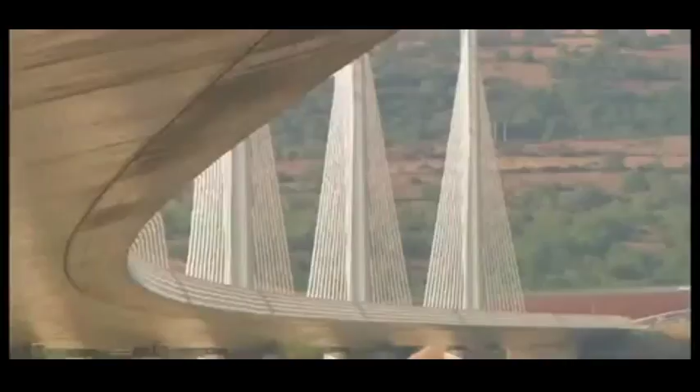This is the Millau Viaduct, the tallest bridge in the world. Its highest tower stretches a staggering 343 meters, so high the bridge glides above the clouds. But this is a megastructure they said couldn't be built. When I first showed the drawing of this bridge, they really thought I was crazy.

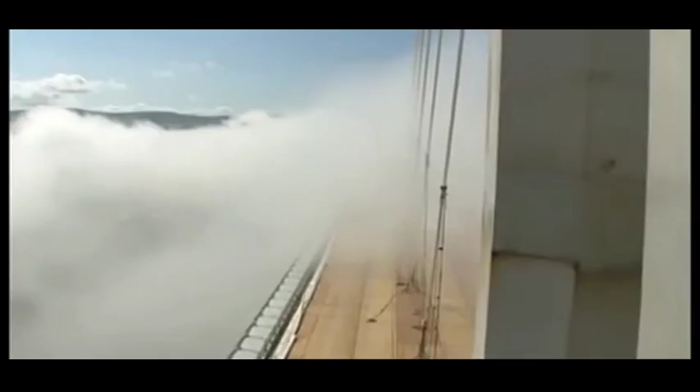The team attempting to build this amazing freeway in the sky had to survive landslides, fight winds gusting at 130 kilometers an hour, and weather massive storms as the bridge simply hung in the balance. It's a bridge that pushes the boundaries of engineering to the limits, and then beyond.

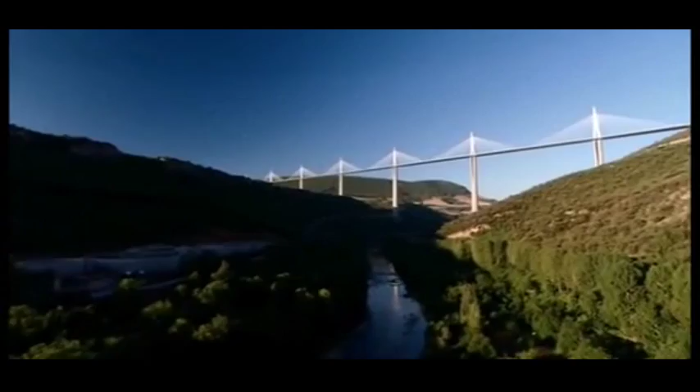Imagine building a series of Eiffel Towers, then slinging a 4-lane highway between them, all the way across one of the deepest valleys in France. Impossible though it sounds, that pretty much describes the building of the Millau Viaduct.

From the start, the construction team faced 3 daunting challenges: build the tallest bridge piers in the world; put a 36,000-ton freeway on top of them; and erect 7 steel pylons, each weighing 700 tons. And what's more, they had to do this hundreds of meters above solid ground, so high that if you were on top of the Eiffel Tower, you'd still be looking up at this awesome bridge.

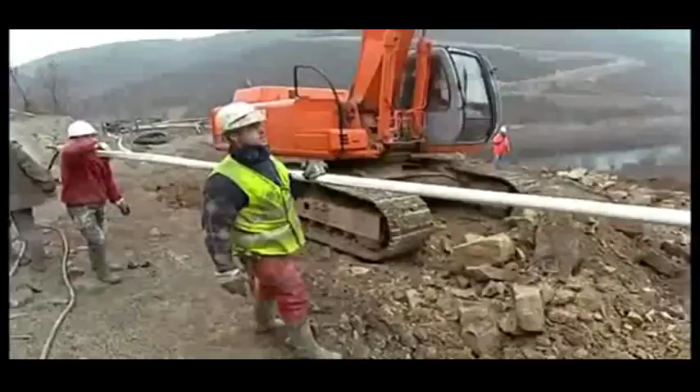October 2001, the team break ground. They're required to build a bridge that'll last for 120 years. And to win the contract, the teams promised to build it in record time, less than 4 years. By comparison, the world's longest suspension bridge, the Akashi Kaikyo in Japan, took a full 10 years to build.

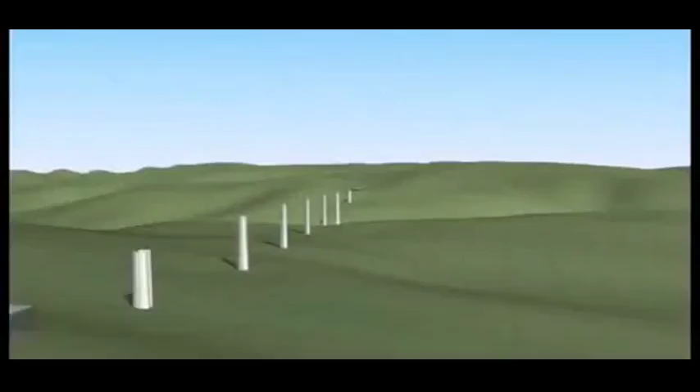To up the ante, any delay will cost them $30,000 a day in penalties. There are 7 piers numbered from the northern end of the valley. Number 1 will pose problems because of the steep slope. Number 2 will be the biggest challenge since it's the tallest. Crossing the river, number 3 is not much shorter. Then 4, 5, 6, and 7 climb the gentler slope to the south.

To begin, the team had to bury the foundations deep in the bedrock in order to support the enormous weight the bridge will place on them. But the forces of nature were stacked against them.

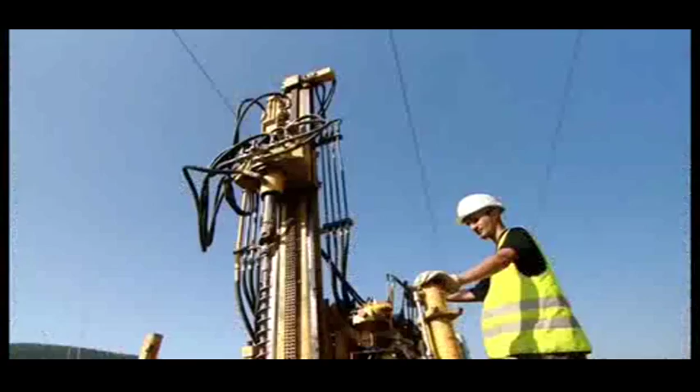Geologists have warned of the risks posed by the region's fractured limestone. The rock is full of cavities that are essential to the local cheese economy. These cave systems, close to Millau, are home to a unique bacteria responsible for the blue mold in the world-famous Roquefort cheese. But what's perfect for cheese could be disastrous for a megastructure.

The geologist's diagnosis spelt one thing: landslides. This kind of catastrophe could jeopardize the entire project. Despite the warnings, building went ahead as planned.

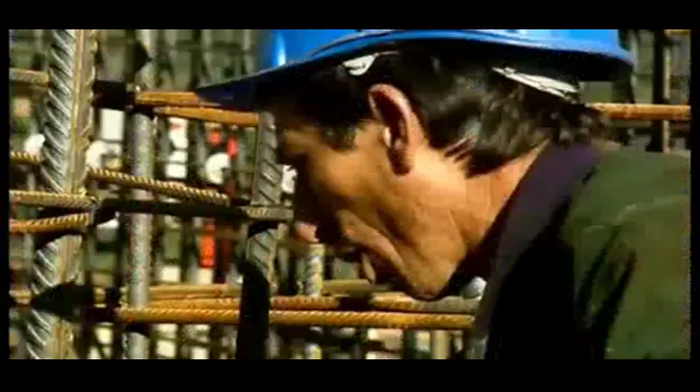Then, well into construction, as predicted, a dramatic storm causes a landslide. 4,000 cubic meters of rock collapse around Pier 1. Fortunately, the fallen rock doesn't damage the pier, but the warning is clear. They're forced to divert precious manpower and equipment to stabilize the slope and prevent a repeat collapse.

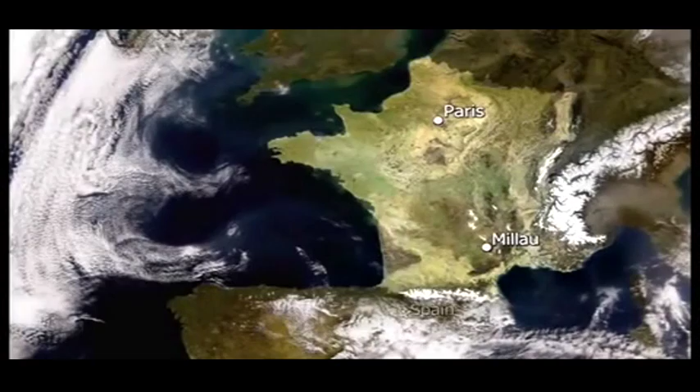So if the area is prone to landslides, why did they build the world's tallest bridge here in the first place? The answer is simple. In the 1980s, France built a freeway linking Paris directly with Spain. This major artery headed south across the French countryside, while from the Mediterranean, the freeway headed north, until they both hit one of the deepest valleys in France and stopped dead.

Welcome to Millau, France's least favorite bottleneck. The town of Millau is in the mountainous region of the Massif Central, one of the most tranquil parts of France. But in summer, this poor medieval town suffered traffic hell.

The locals couldn't take it anymore. Neither could their mayor. It was terrible for our reputation. When you hear every day on the television and radio, avoid Millau, there's a traffic backup, a 5-hour wait in Millau.

And it's not just the people of Millau. Two drivers, Jamila and Jemima, crossing the 30-odd kilometers between the freeway on either side of Millau, reveal exactly why this bridge is needed. Jamila, in car 33, will cross the new bridge, while in car 22, Jemima will take the old road across the valley floor.

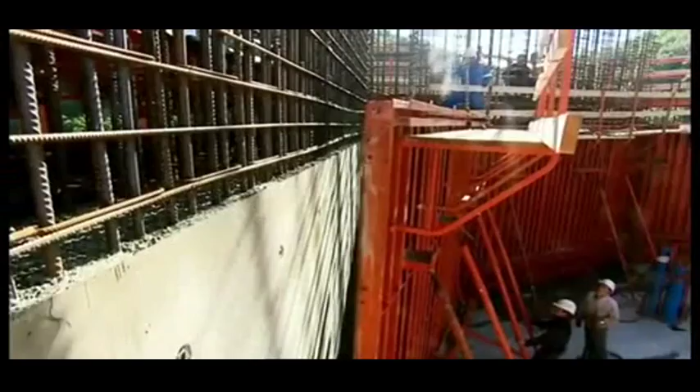The Millau Bridge would not only be the world's tallest, it would be unlike any bridge ever constructed.

When I first showed the drawing of this bridge to the relevant authorities, they really thought I was crazy.

Virlogeux's Normandy Bridge has two sets of cables supporting the deck. But he wanted to up the stakes for Millau by losing one row of cables, so the remaining line would be forced to do twice the work. More dramatically, the 2.5-kilometer Millau Bridge, instead of having a single main span, needed a whole series of piers to support it across the valley.

No bridge builders had ever attempted a multiple-span, single-line cable-stay bridge on this scale before.

The French authorities had a problem. Nervous about Virlogeux's groundbreaking scheme, they held a competition inviting other engineers and architects to compete with different designs.

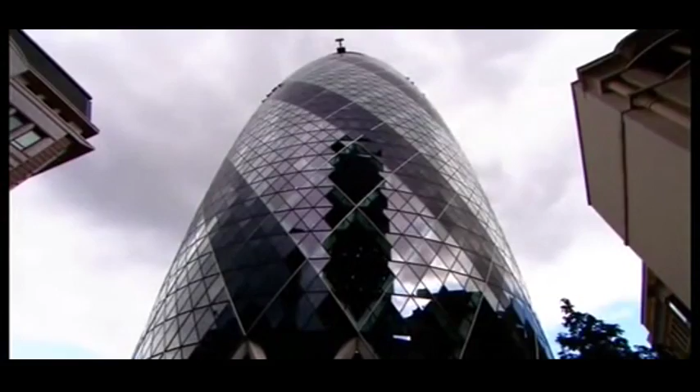The winner, Lord Norman Foster, is one of the world's superstar architects. In Hong Kong, he built the world's largest airport terminal. In Barcelona, offices literally hang from a mast on his communications tower. This is a man who regularly contemplates the impossible and delivers.

You know, it's the challenges, and it's one challenge on top of another, on top of another. And with Millau, one of the biggest challenges was making it fit into the landscape, given it's just down the road from the famous Gorges du Tarn, France's equivalent of the Grand Canyon.

How do you make something which has to be so immensely strong against the forces of nature look very gentle, very delicate? How do you weave something on that scale into the most unbelievable landscape?

Ironically, Foster's answer was to take Virlogeux's pioneering scheme, then push it one stage further. He turned an elegant piece of engineering into a delicate work of art by boldly cutting out two of the nine original piers and seriously slimming down the remaining piers and road deck.

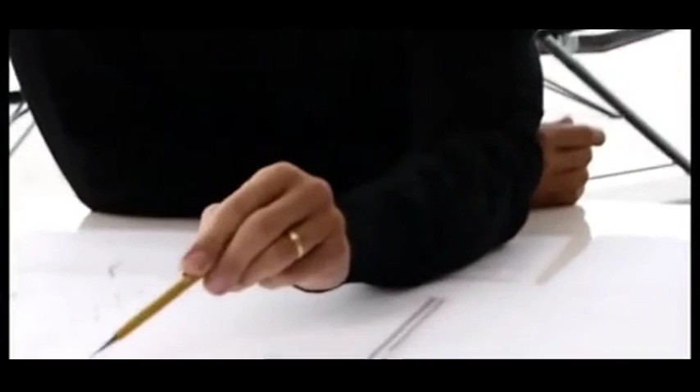Foster wanted the bridge to appear as delicate as a butterfly, but this butterfly has to support the weight of five Eiffel Towers in gale-force winds hundreds of meters above the River Tarn. Getting the design wrong would be a disaster.

Then, with Millau still on the drawing board, Foster's record as a bridge builder suffered a major setback. His Millennium Bridge in London is actually another record-breaking structure, the lowest profile suspension bridge in the world. But when this footbridge opened to the public in June 2000, it was a public relations disaster.

Crowds walking over it set up a resonant frequency, and the bridge began to sway. As people adjusted their step to the small initial wobble, the effect was magnified. Though it didn't threaten the structure, the swinging motion became so dramatic the authorities closed the bridge for a refit that took 1.5 years and ended up costing over $8 million.

It was a bad omen for the Millau Bridge, where construction was soon to begin. And at 15 times the height, a design flaw would be a catastrophe.

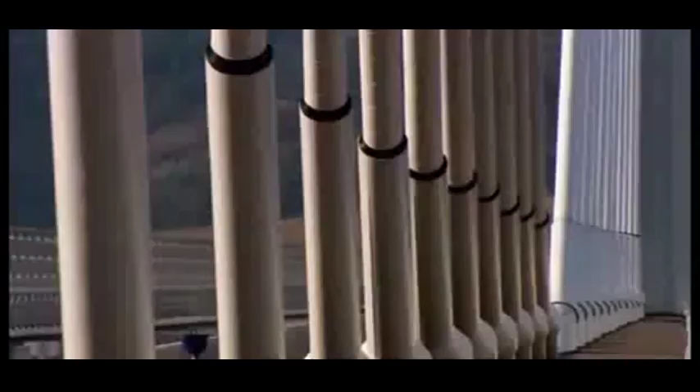December 2001, France's Millau Viaduct, the tallest bridge in the world, is under construction. Everything about this project is supersized. It'll need 200,000 tons of concrete, so much that the team have to build a concrete factory on site.

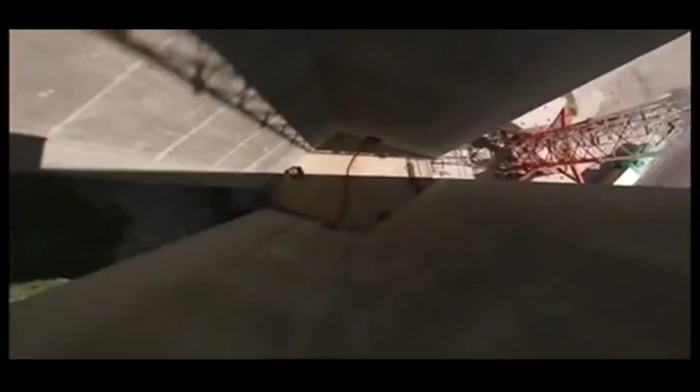But there's nothing straightforward about this concrete. The formula must be just right. It needs structural strength to support the massive loads it'll have to bear. But it can't set too quickly, as it has to be hoisted into position and poured hundreds of meters in the air. And it needs to be just the right color to suit Norman Foster's vision.

In fact, the architect's vision has created a headache for the construction team. He's designed each pier as a complicated geometric shape, tapering the entire way up with vertical grooves set into them to create shadows. But what's just a line on paper for the architect was a major challenge to build.

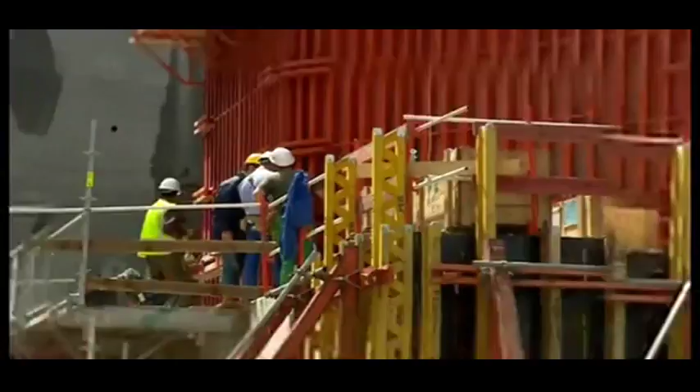The enormous piers are built step by step by pouring concrete into a temporary mold. To give the required strength, the molds are filled with a frame of steel reinforcing bars.

In total, 16,000 tons of these steel bars are hoisted into place and secured. Laid end to end, they'd stretch the 4,000 kilometers from Millau all the way to Central Africa.

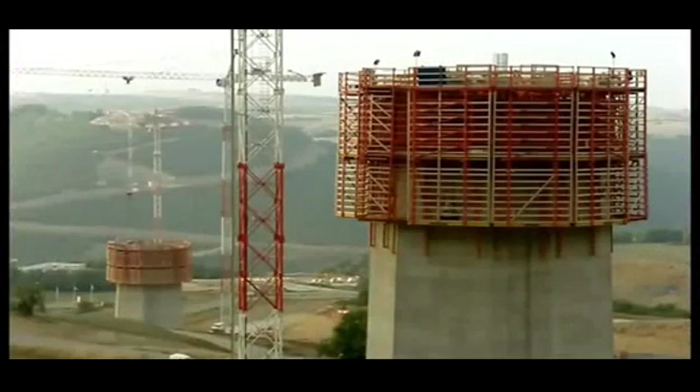The shape of each pier is seriously complicated. As a result, each time they remove the sections of red steel shuttering, they have to change the shape of the mold to fit the profile of the next 4-meter section.

Manhandling these steel panels, weighing up to 15 tons apiece, is no picnic. And with the combined height of the seven piers totaling well over a kilometer, they have to change the shape of the mold over 250 times.

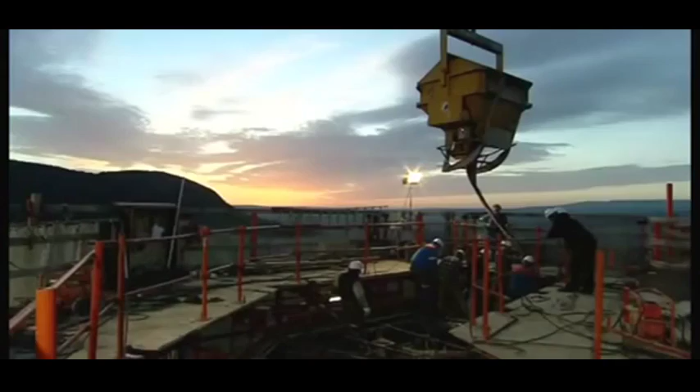Every 3 days, each team on each pier went through this whole cycle, then repeated the process. But it was a race against time, with a permanent threat of delay.

Keeping the entire build on time and to budget was the daunting responsibility of one man, Jean-Pierre Martin. If instead of 3 days we took 4, imagine that multiplied by the number of castings. We'd end up with a 3 or 6 month delay.

With a penalty of nearly $1 million a month, this isn't something Martin wanted to contemplate. And this schedule wasn't his only headache.

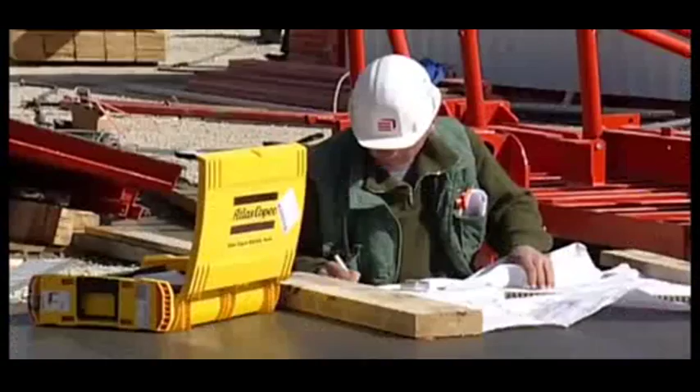You have to be pinpoint accurate when you're building the tallest bridge piers in the world. Get it wrong, and the bridge simply won't fit together.

Just 10 centimeters out, about a hand's width on each 4-meter section, and the tallest pier could be 6 meters off at the top, the width of a jumbo jet fuselage.

Each team was aiming for a specific point in the sky. For Pier 2, this was exactly 245 meters above the ground, 546 meters from the north side, and 1,914 meters from the southern end. There was no room for error.

The only chance they had to get it right was with GPS, accurate to within 4 millimeters. Using signals from multiple satellites, the team could pinpoint their position and make sure they're on target for that critical point in the sky they needed to hit.

Month after month, the piers climbed higher. Finally, by November 2003, they reached their full height. At 245 meters, Pier 2 becomes the highest bridge pier in the world.

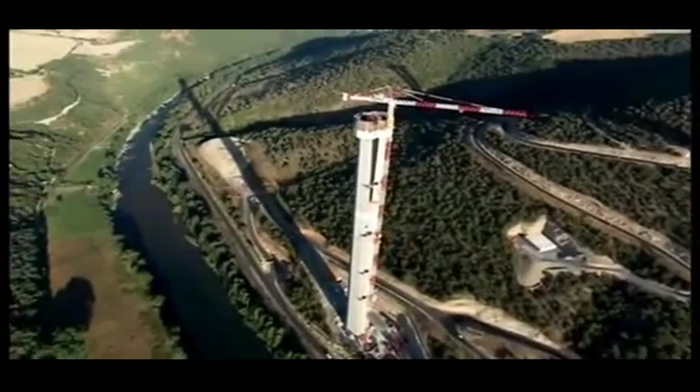But is this record-breaking pillar where it's supposed to be? Amazingly, it's dead on target, to within 2 centimeters.

Champagne corks pop. It's time for a major celebration.

Against all the odds, they were 1 month ahead of schedule, but the team couldn't afford to relax. The next stage of the project would be the most difficult part of the build.

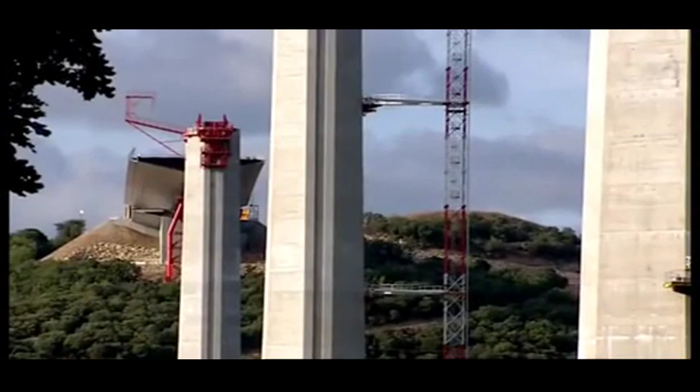Phase 2 of building the world's tallest bridge involved putting a 2.5-kilometer roadway weighing 36,000 tons on top of the piers, a full 270 meters above the River Tarn.

Bridge builders know danger comes with the territory, but working at these heights can be lethal.

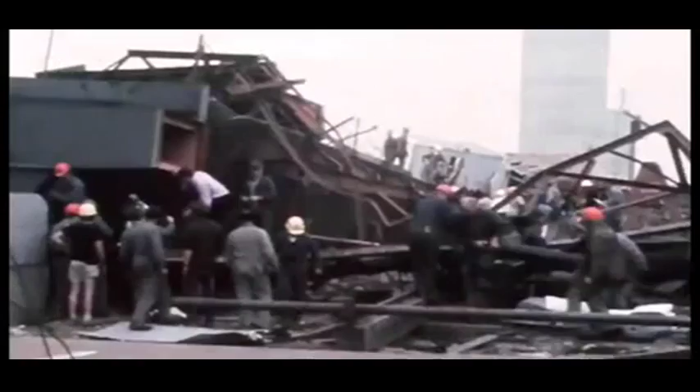More than 34 died constructing New York's Brooklyn Bridge. 35 died in 1970 on the Westgate Bridge in Melbourne, Australia. And 1 year later, 13 workers were killed when the Koblenz Bridge in Germany collapsed into the Rhine.

With these fatalities in mind, the team decided to fabricate the entire road deck on the safety of solid ground. This meant building it in steel, which in theory would be much safer than lifting vast concrete sections hundreds of meters into position.

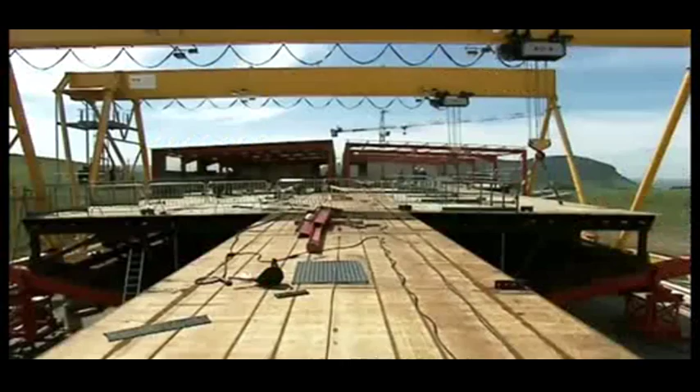There's only one problem with this plan. No one had ever put a road deck on piers anything like this height before, let alone over a 2.5-kilometer span.

In the end, only one steel manufacturer had the courage to take on this colossal challenge. Eiffel, the steel firm set up by the great French engineer.

Eiffel built what was once the tallest bridge in the world, the Garabit Viaduct in southern France, before getting round to the framing for New York's Statue of Liberty and, of course, his signature tower in Paris.

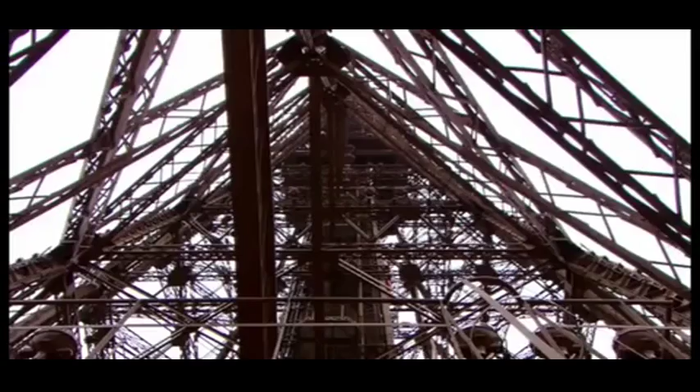But despite the company's experience, Eiffel's director, Marc Buonomo, knew he was taking a serious risk. It was a gamble for the company, because if there had been a mistake, if it hadn't worked, it would have been the whole company.

They fabricated the massive sections that would make up the road deck in the company's steel factories. This immense jigsaw puzzle involved manufacturing 2,200 separate sections, weighing up to 90 tons, and some of them 22 meters long.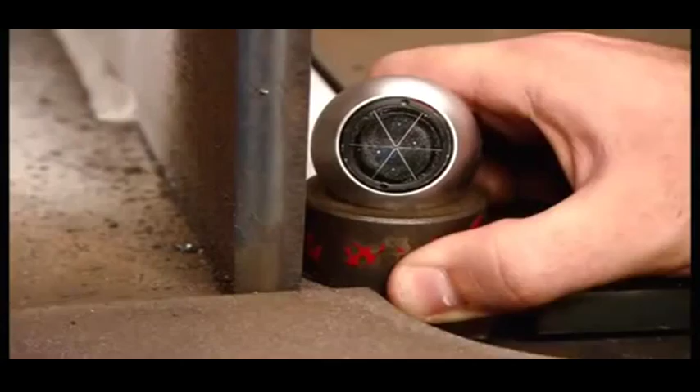Their accuracy is measured with a laser to within a fraction of a millimeter.

The huge square tubes are the central spine that should make the deck rigid. The triangular side panels will be welded on either side to create the width for a 4-lane highway.

To meet the punishing schedule, Buonomo automated the manufacturing with a 2-headed welding robot and a plasma cutting machine.

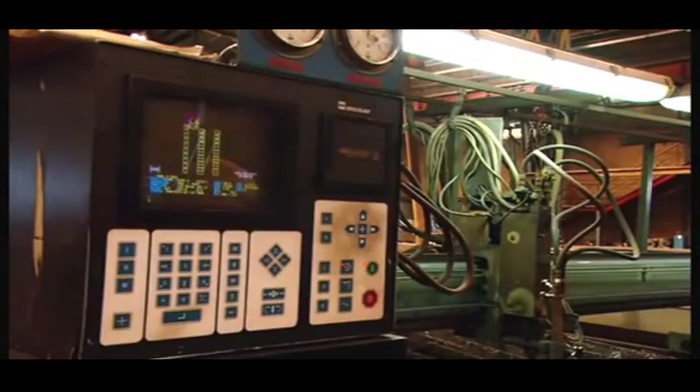Each cutting pattern or template is programmed into the computer. Then the machine automatically blazes its way through the steel. The torch reaches a scorching 28,000 degrees centigrade. That's 5 times the temperature of the Earth's inner core.

But cutting and welding was the easy part. The hard part was getting these monster sections the hundreds of kilometers from the factories to Millau.

The routes had to be planned with precision to avoid major damage. The police coordinated safety and clearances.

Even with that level of preparation, some obstacles felt as if they're cutting it just too close for comfort.

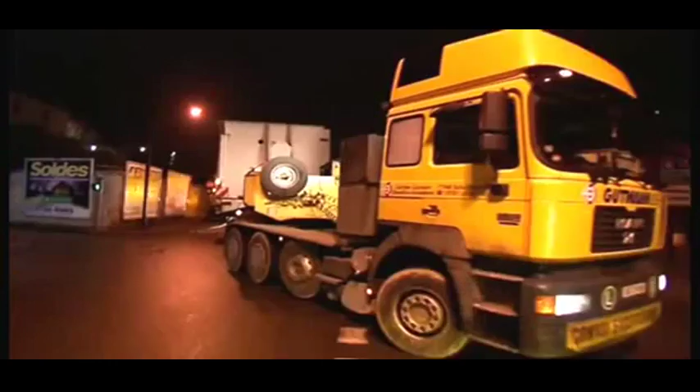And this was no one-off event. To build the viaduct took over 2,000 of these extraordinary road convoys.

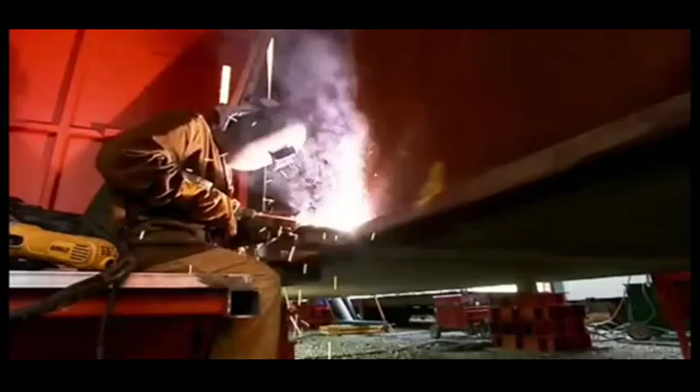The components arrived at assembly plants set up on either side of the valley. Here, the pieces of a massive jigsaw puzzle were welded together to form the 2 halves of the deck. But getting these 2 halves to span the valley, on top of the world's tallest bridge piers, would be a major challenge. They'd be the first team to put a road deck on a pier taller than an 80-story skyscraper.

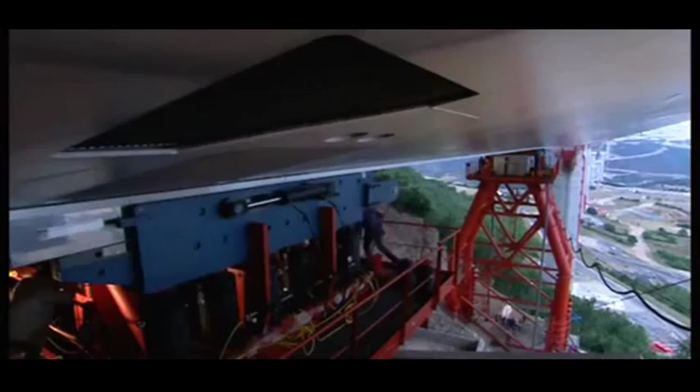Pushing bridge building beyond anything attempted before, they planned to slide the entire 2.5-kilometer road deck over in 2 colossal pieces. The bridge's chief engineer, Jean-Marie Cremer, was one of the few people who believed it could be done. All the engineers who know this method didn't believe it was possible. If the team had got their calculations wrong, the entire structure could collapse into the valley.

We found a solution for the construction, which was to launch the bridge from the 2 sides. One part on the Larzac Plateau, one on the Rouge Plateau. And to push them from the 2 sides, and to make them come and meet here, above the River Tarn.

Smaller bridges use a similar technique. A powerful set of hydraulic rams literally pumps the deck from one side to the other. But Millau would be the longest launch ever attempted over the highest piers in the world, and the results could spell disaster.

The deck is so slender, it would bend and collapse if it were pushed out over the 342-meter spans between each pier. The furthest anyone's previously managed is less than half that distance.

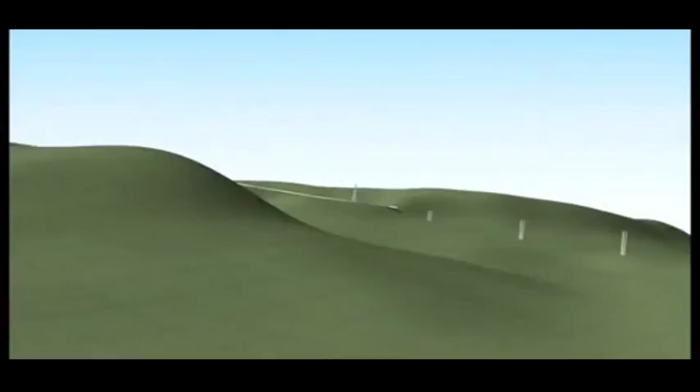The first part of the solution was simple. Fit a pylon so its cables support the front of the deck as it goes out over the valley. Then construct temporary steel support towers that halve the spans to a more manageable 171 meters.

These steel towers were a construction feat in themselves. The largest, over 170 meters high, is the tallest ever built, and they needed to carry a massive load.

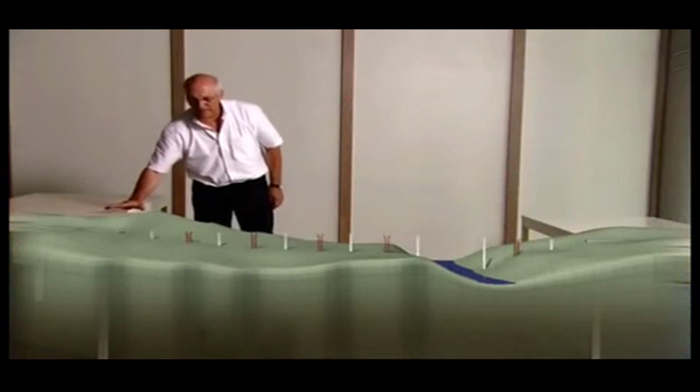7,000 tons as the leading edge of the deck, together with the first 90-meter pylon, slide over. And simply pushing this enormous weight over the top of the vulnerable piers would bring them crashing to the ground. This was the nightmare scenario. If we'd done a conventional launch, we would have knocked the piers over like the pins in a bowling alley.

Someone needed to reinvent the way this type of bridge is built. And it's Marc Buonomo with Jean-Marie Cremer who came up with the breakthrough. The basic principle can be demonstrated with a heavy box and a wobbly table.

With a normal launch, you knock over the piers. I want to advance the deck over the pier, but if I push the deck from here, I'd knock over the piers, because they're so tall. The idea is to install a launching system on top of the pier, and that way, if I push the deck, it has no effect on the stability of the piers, and the piers won't fall over.

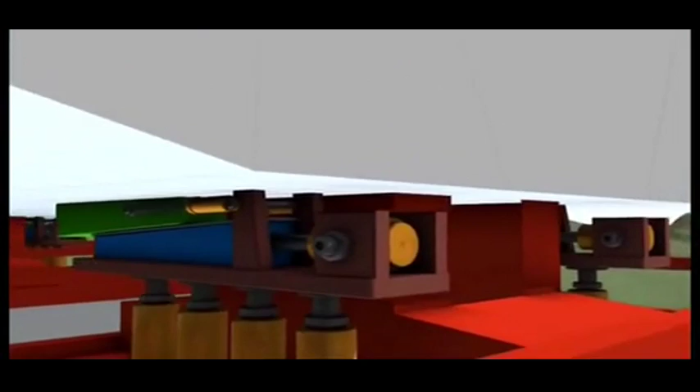The trick is to use a series of these launching systems to jack up the deck and inch it forward. Each system uses two wedge-shaped blocks under each side of the deck. The upper wedge is pulled forward by a hydraulic ram. It slides up the slope of the lower wedge at the same time, lifting the deck from its supports and advancing it 600 millimeters. The lower wedge then retracts, dropping the deck onto its supports. The upper wedge returns to its original position, and the whole cycle begins again.

4 of these clever devices are placed on each pier, all programmed to work at exactly the same time. The result is that together, they pick up the entire roadway and shunt it forward. But if one fails or gets out of step, it could spell disaster. The force could push the bridge piers apart till they collapse.

When you're up there and you see Millau 300 meters below you, you ask yourself, was this a good idea? The future of the entire project was now hanging on a prototype, and it had never been tested.

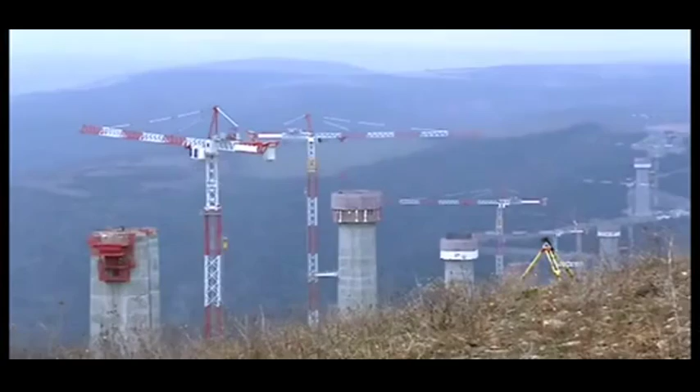It's the morning of February 26, 2003. Do or die day for the world's tallest bridge. Everything is about to be put to the test: the flexibility of the deck, the strength of the temporary piers, and critically, the pioneering hydraulic ram system.

Even Buonomo, the man in charge of the launch, had his doubts. As it had never been done before, I have to tell you, I had fears that it wouldn't work.

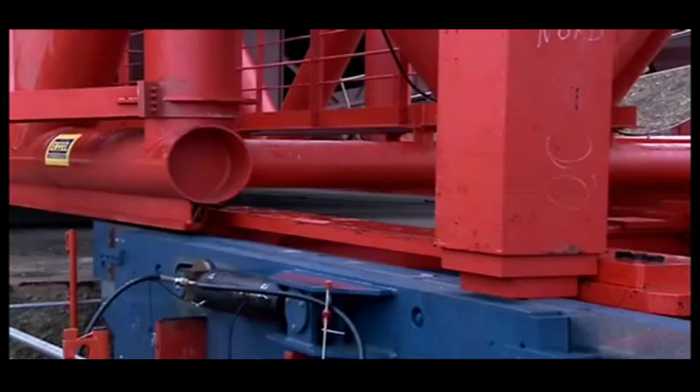The pumps kick in, the pistons start to push, and the deck begins its huge journey across the valley. The moment I heard the motors start, I put my finger on the deck, and I could feel my finger move.

Every 4 minutes, the deck advanced 600 millimeters across the valley. Surveyors tracked its progress. But it was still a nail-biting time as they watched the unsupported deck crossing the void.

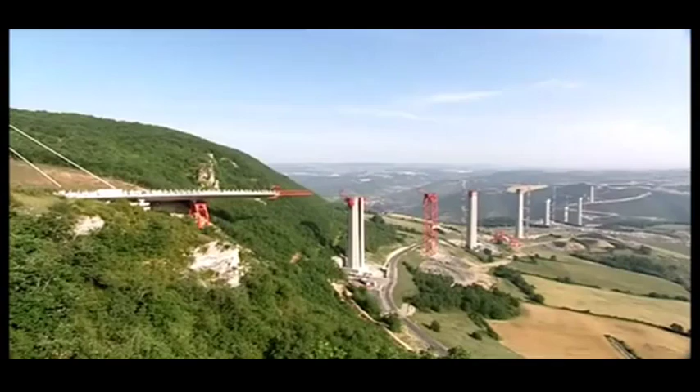Eventually, the deck reached the safety of the first pier—204 meters down, only 2,256 to go. The launching system seemed to be working as planned, and the engineers were feeling optimistic.

But as the deck advances into space, it becomes more vulnerable to the wind, which can reach 130 kilometers an hour. Unfortunately, the road deck has the shape of an upside-down airplane wing, and the team's greatest fear is that this wing could simply take off.

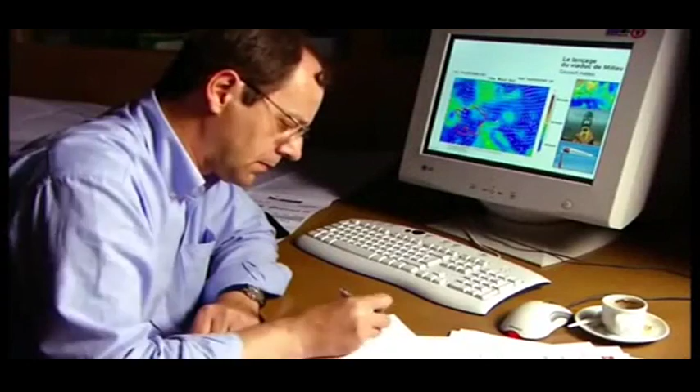The engineers kept a close eye on the wind and weather conditions. When they were satisfied there was a 3-day weather window and the wind wouldn't exceed 85 kilometers an hour, they'd give the construction team the go-ahead, and the deck launch could continue. The reason for this precaution is simple: strong winds can literally tear a bridge apart.

In 1940, Washington State built a suspension bridge across the Tacoma Narrows in the U.S. Northwest. It opened with a grand ceremony on July the 1st. But the celebrations were short-lived—the bridge had a major problem: the wind.

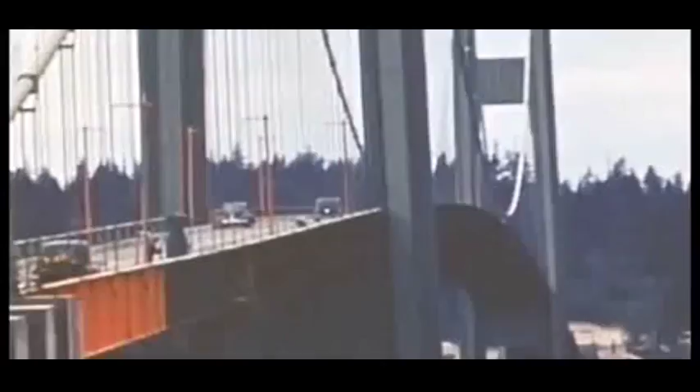Girders beneath the deck, designed to make the bridge rigid, actually blocked the wind, causing the roadway to ripple alarmingly. Locals soon dubbed it Galloping Gertie.

On the 7th of November, with the wind less than 70 kilometers an hour, the bridge begins to twist violently. At 11 a.m., time runs out for Galloping Gertie, as the wind sends the bridge crashing into the river.

Wind tunnel testing is now standard procedure as a direct result of Galloping Gertie. For the Millau Bridge, they analyzed the wind in the Tarn Valley over 18 months, then recreated those conditions in the wind tunnel. Wind engineer Olivier Flamand was shocked by the results.

The average wind speed was relatively low, but because of such strong turbulence, it created very fast peak winds. The rugged terrain creates serious turbulence at the height of the road deck. Winds peak at 130 kilometers per hour—that's hurricane force.

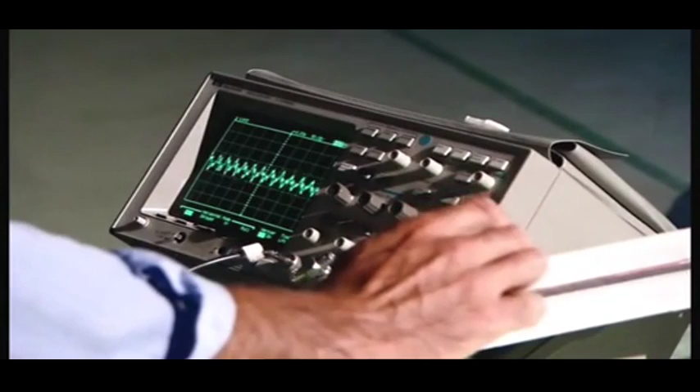They tested every aspect of the bridge to analyze the risks: piers, pylons, and critically the deck. But it's not just the aerodynamics of the finished bridge—they needed to find out how it would behave when it was most at risk, during the launching of the deck.

Olivier and his team reached a chilling conclusion. The winds they've measured are strong enough to blow the unsecured deck off its supports and send it crashing hundreds of feet to the valley floor.

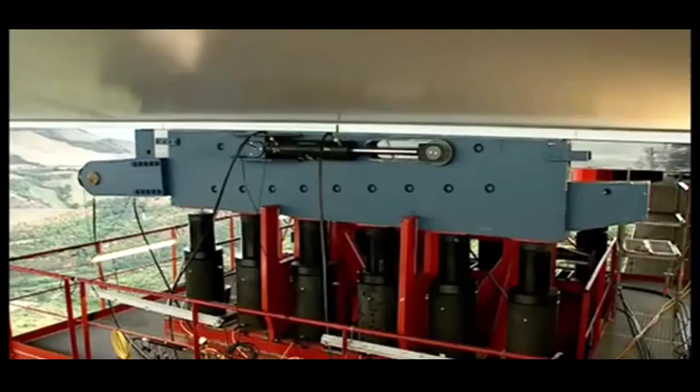And then the nightmare began. On the 22nd of August 2003, 6 months into the deck launch, one of the launch systems failed, leaving the deck hanging in the wind. To make matters worse, the weathermen were predicting storms.

So far, these massive pumping machines had worked perfectly. But the fact is they were prototypes, and due to the frantic schedule, they'd never been tested.

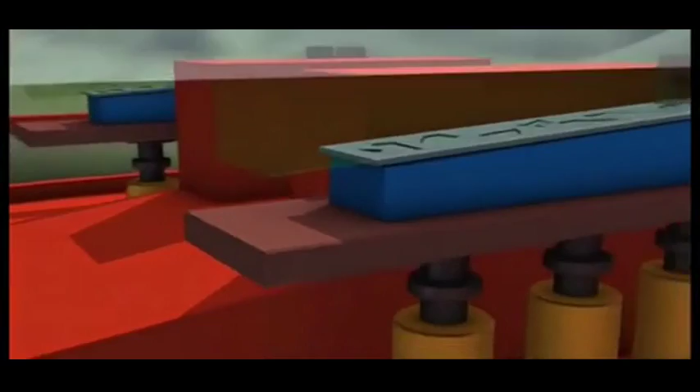The problem was that the non-stick Teflon between the sliding surfaces had ripped, and the friction generated was too much for the hydraulic rams to push against. Unfortunately, no one had planned on replacing parts of this monster machine mid-launch on top of a massive concrete pillar. This was very bad news for the man who staked his reputation on this system.

It was maximum stress, like poison in your mouth. You don't forget that.

Re-examining their calculations, they realized the cause of the problem: it underestimated the forces between sliding surfaces, but they wouldn't be able to repair it without the necessary spare parts. The clock was ticking, and Marc Buonomo needed a solution fast.

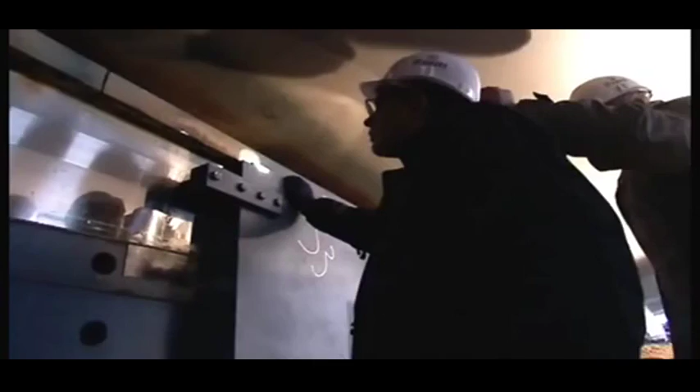When Apollo 13 came back with that incident, the NASA engineers requested they did the inventory of everything there was on board to know how to fix it.

The Millau team did an inventory. They realized that the other launching machines, not yet being used, could be stripped to provide the new Teflon surfaces they needed. Working all through the night, the team extended the access platform, allowing them to take out the 5-meter-long, 2-ton steel wedges, replace the Teflon, and reassemble the launching machine.

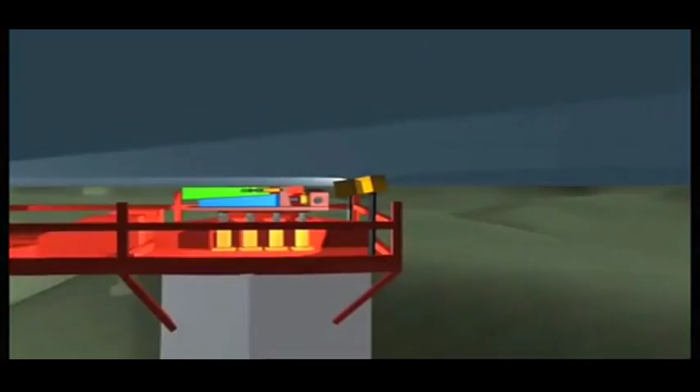By 8 a.m. the next morning, it was ready to resume the launch. The rest of the week, the predicted storms arrived, and another set of launching machines wore out. So when the deck finally made it to the safety of the next pier, the team breathed a major sigh of relief.

You don't forget that. I won't forget that for 4 hours I was really scared.

The two decks continued their journey across the valley. Day after day, week after week for a full 14 months, they approached each other, millimeter by millimeter.

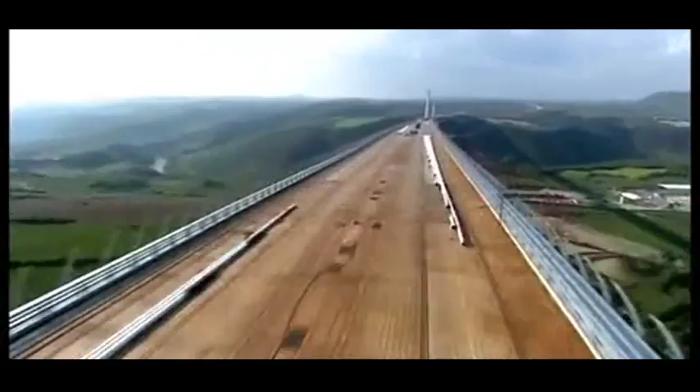By May 2004, they'd reached a critical phase. From the northern end, the shorter deck had traveled 717 meters into space to reach its final resting place. From the south, the longer deck extended over 1.5 kilometers. Only the section over the river, the one point where it was impossible to erect a temporary pier, divided them.

But would they meet as planned? If they've got their calculations wrong, they'll have built the biggest white elephant in Europe. Even the man behind the whole project had his doubts. I was not convinced at all that the two parts of the deck could meet exactly with a perfect geometry.

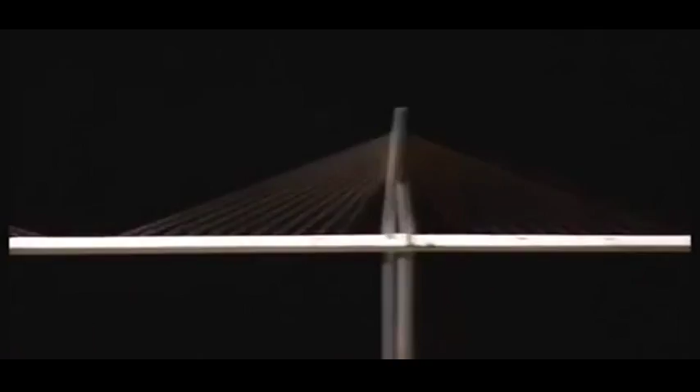The odds were against them. Calculating such a feat so precisely is a Herculean task. Firstly, the two starting points on the northern and southern slopes of the valley are at different heights. Secondly, the bridge has a subtle curve to it. As a result, each steel panel which makes up the road deck had to be cut and welded with extreme precision. It would be an engineering triumph if they got these two sloping curved decks to meet as required.

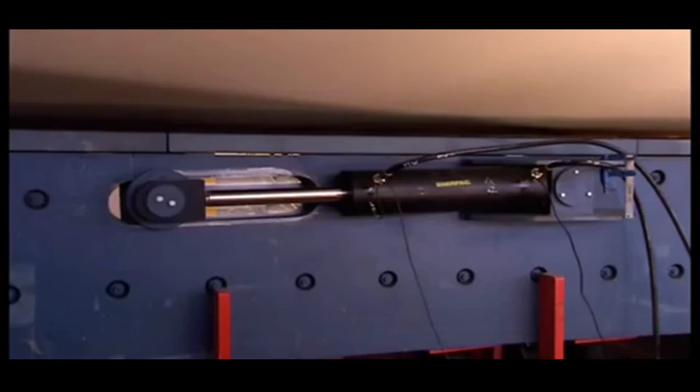The team checked the weather reports. With the wind inside safety limits, they gave the go-ahead for the final push. The rams began to drive the deck's leading edge off the safety of Pier 3 towards its destination. At this point, a total of 21 launching systems needed to move at exactly the same moment to avoid disaster.

If anything were to go wrong now, the man responsible would be Marc Buonomo. Everyone asked me, how can you be sure that it will go straight? So to be sure that they were going to the right place, I had a GPS put on the front, so I could see the gap between the theoretical and the real position.

Over the next 2 days and nights, the deck advances 600 millimeters at a time towards its final resting place. The world's media are watching the critical meeting of the decks. And to add to the pressure, the French Prime Minister is due to drop in to celebrate the event.

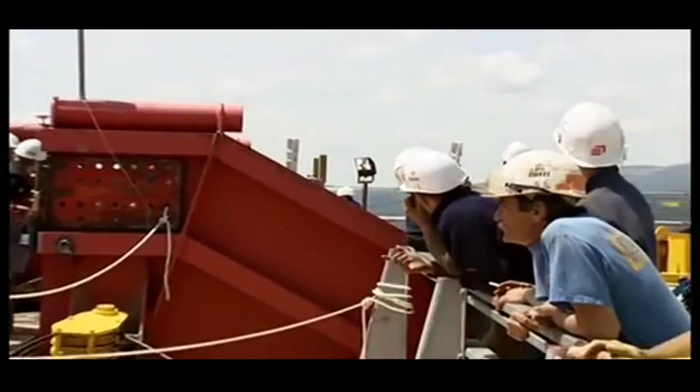The deck pushes forward, now with only centimeters separating the two sections. A magnum of champagne is hung between them to mark the moment. At last, union. The two massive steel decks have traveled high over this valley, a total of 2.5 kilometers, and when they check, they're aligned to within 1 centimeter. That's accurate to within 99.9999%. All the measuring, all the calculations have paid off. They've nailed it.

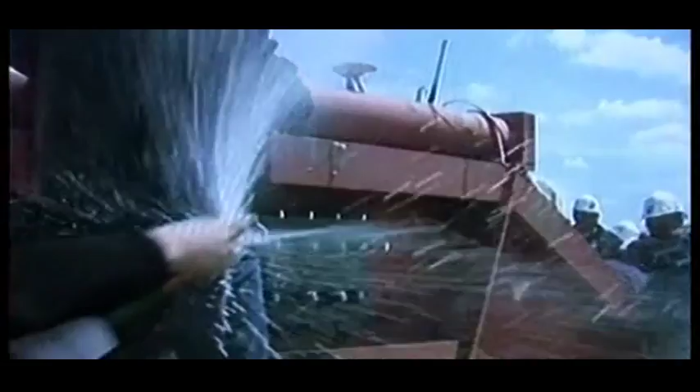The meeting of the decks was a special moment. News reports traveled round the world, and in Salzburg, Austria, they reached Felix Baumgartner, aka Felix the Conqueror. Felix has made a career base jumping from some of the tallest structures on the planet, and within 24 hours he'd driven to Millau and was calculating the logistics for the jump.

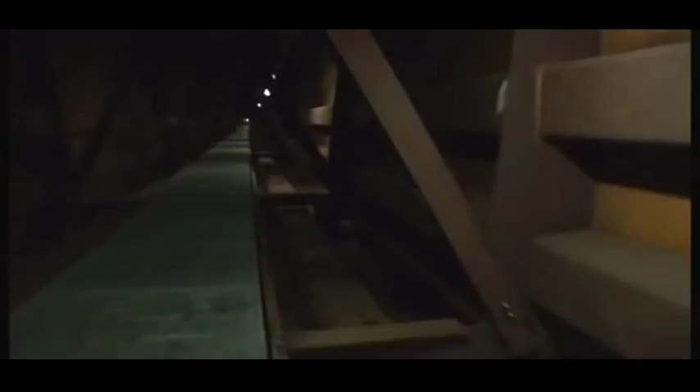Factoring in his two main aims, to avoid arrest and death. Baumgartner waited for darkness before arriving on site. He found his way to the base of Pier 2, then climbed an access ladder the full 245 meters to the top. He entered the steel road deck and found a place to hide until daybreak.

He had to remain concealed until the sun was high enough for his cameramen to record his world record attempt. At 7 a.m. the following morning, Felix the Conqueror emerged. He took a cool backward flip off the tallest bridge in the world and entered the record books.

The tallest bridge in the world, 250 meters. I did it. And having evaded death, he made sure he's not caught by the police.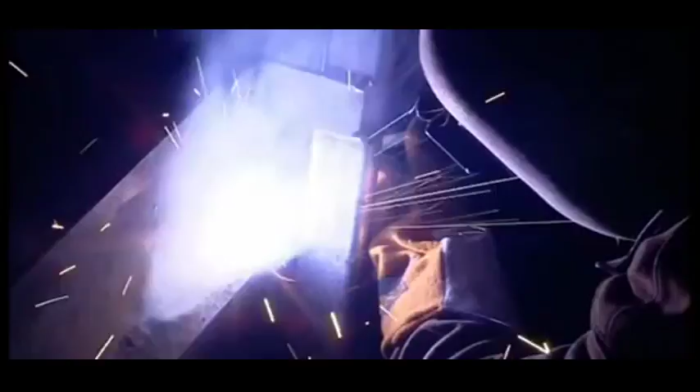The decks have been joined, and the team have reached the final phase of the project. But there was still a race to meet the schedule, and their problems weren't over yet. Everyone could see the dramatic undulations in the flexible steel deck. Even some hardened bridge builders wondered about its structural integrity.

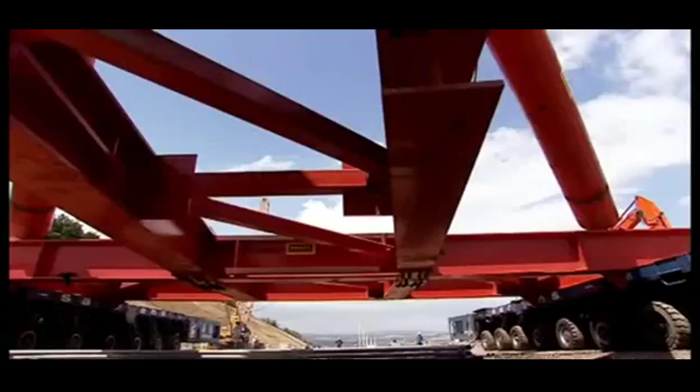It was a huge surprise for everyone. All the engineers said, we knew steel was flexible, but not that flexible. The team were relying on the pylons and cables to pull the deck straight. Each massive pylon is 90 meters high and weighs 700 tons, the equivalent of 85 London buses. Placing them in position on the slender deck, high above the valley floor, would go beyond anything ever attempted.

Once again, Marc Buonomo had a plan. You know, the first people to make vertical pylons were the Egyptians. Buonomo adapted a technique used in ancient Egypt to erect obelisks in the sands.

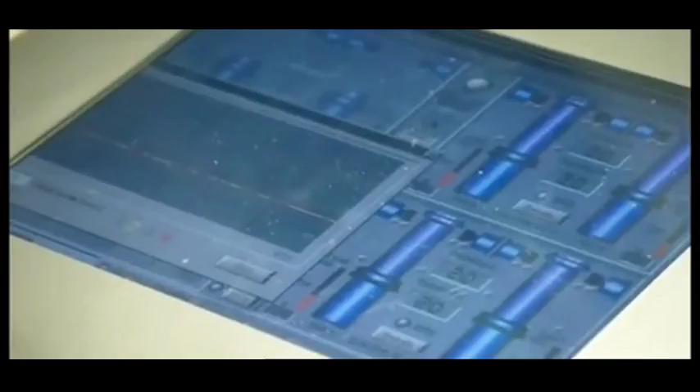On top of the road deck, the team put up two enormous steel towers, both of them secured by cables and equipped with a hydraulic system capable of raising 1,000 tons. The 700-ton pylon is then lifted by the hydraulics. As it rises, it pivots little by little until it's vertical. It's then lowered safely onto its anchorage point. Buonomo's 4,000-year-old technique worked to perfection.

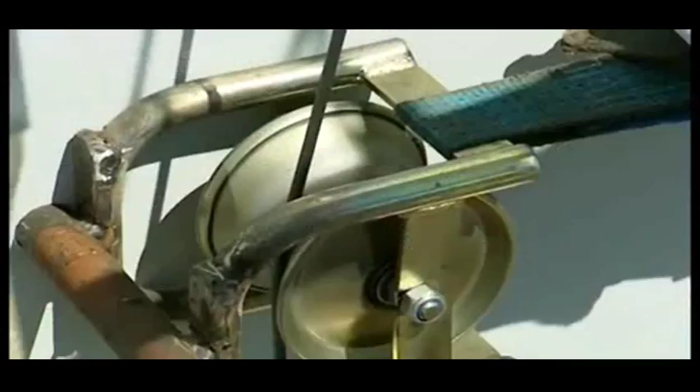With all 7 pylons in place, the team could attach the cable stays that would straighten the rippling deck and give it the strength to cope with full traffic loads, they hoped. The weight of the roadway is now over 40,000 tons, the equivalent of a cruise ship, and the 154 cable stays should prevent it from sagging or collapsing. The strongest stays are made up of 91 individual steel strands and have a breaking strength of 25,000 tons, strong enough to hold back 25 jumbo jets, all at full throttle.

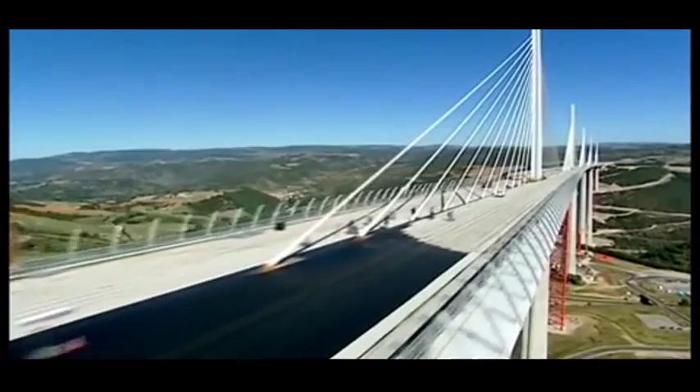As the cable stays are tensioned, true to plan, the ripples in the road deck are pulled straight. Over the 2.5-kilometer deck, the ripples are now no larger than the size of a thumb. They're finally on the home straight. The road surface goes on, adding a further 10,000 tons to the load. That's like driving 153 battle tanks onto the deck. But before it could open to the public, the team needed to know the bridge is safe. It would have to pass one crucial test.

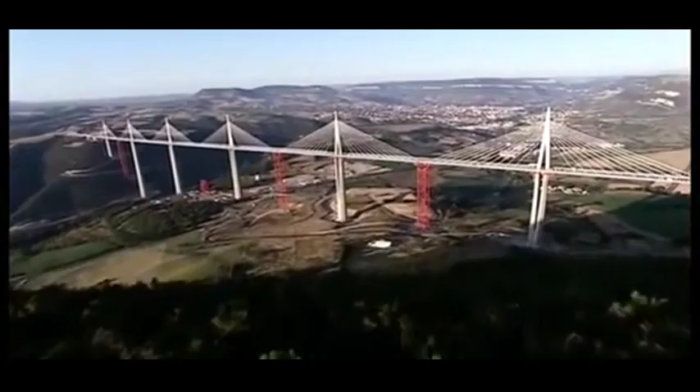After 3 years, the construction team building France's Millau Viaduct, the world's tallest bridge, are about to find out if they got their calculations right.

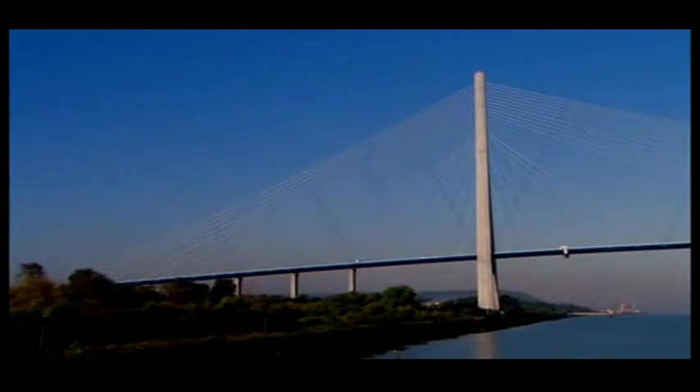On a single-span cable-stay bridge like the Normandy Bridge, a large load on the main section is no problem, because the cables are attached to solid ground and can't give. On the Millau Viaduct, with its 8 spans, the cables are attached to the deck of the adjacent sections. A load on one section will cause it to drop, pulling the stays down. As the pylons lean in, the matching stays are pulled upwards, lifting the neighboring decks and causing a dangerous rippling effect.

It's right now the team put their bridge to the test. These 28 trucks have a combined weight of over 900 tons. They are now positioned in the critical point, mid-span. The engineers hold their breath.

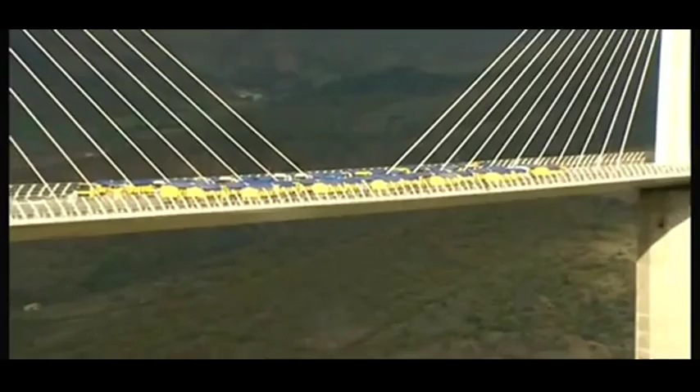Measurements are taken. The span bends just 26 centimeters. This is a triumph for the engineers. The bridge was designed to cope with more than double that.

4 weeks later, on December the 14th, 2004, President Jacques Chirac officially opened the Millau Bridge. A proud moment for the whole of France.

Just over 3 years of construction have produced the tallest bridge in the world, designed to last at least 120 years. And against the odds, the project manager even brought the job in on time. But that's not what he's most proud about.

What I remember, because on construction sites there are often accidents, is that we had no serious accidents, nothing more than a minor injury.

As soon as it opened to the public, the bridge was an instant success. But the real test isn't till its first summer, when the French all take their annual vacation.

No one ever expected anything like this. Numbers peaked at more than 50,000 vehicles a day. At over $7 per car, that's great news for the construction company, who are clawing back their $478 million investment in the project.

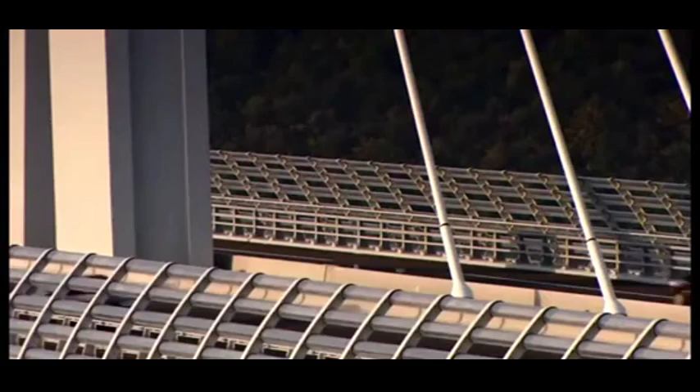This was an epic bridge to build, but it's just as epic to maintain. Thierry and Frank are assigned to P2, the world's tallest bridge pier. This structure is no solid concrete block. It's a series of vast hollow spaces. Their job today is to test the communication system and electric circuits on each of the 7 structural floors.

This involves a 343-meter climb, going hand over hand up a ladder for the rest of the day.

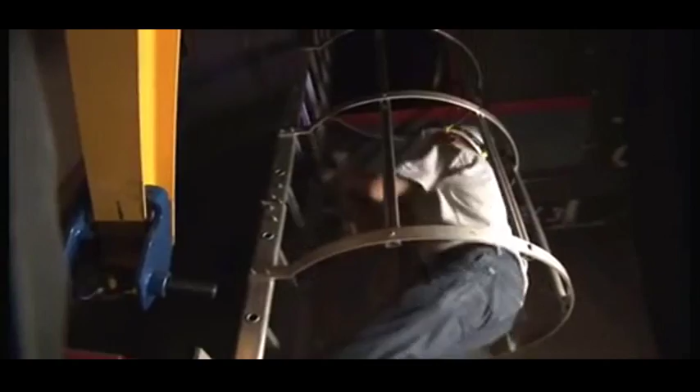By dusk, when Thierry finally reaches the summit of the pylon, he may be exhausted, but there is a payoff. You get a fantastic view from here, a 360-degree panorama.

The tallest bridge in the world has become an icon. But this is creating problems no one had ever imagined. Locals have been taking over the bridge as a platform to get media attention for their causes. This crowd was hoping that driving sheep over this freeway in the sky would help them get more farming subsidies.

Jose's job is to prevent this kind of incident from creating a danger, and on this bridge, the incidents keep on happening. An alarm triggered by a motion detection system means there's a stopped vehicle on the bridge. Immediately, Jose dispatches a colleague to deal with the situation.

The last thing anyone wants is a multi-car pile-up on a 2.5-kilometer bridge, a quarter of a kilometer in the sky.

Jose zooms in his camera to reveal the man has left his car and is sitting dangerously on the crash barrier. The driver's probably only broken down, but already one man who stopped climbed over the wind barrier and jumped to his death.

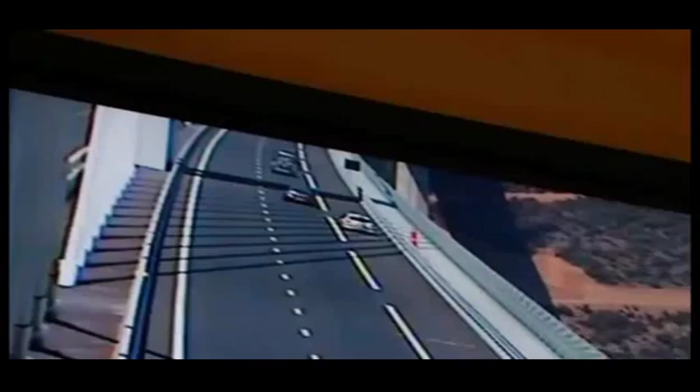You could say the Millau Bridge is a victim of its own success. It's definitely become a major tourist destination. 700,000 visitors in the first 9 months.

Fortunately, most of them wait till they're off the bridge to take their photos.

It's magnificent. I came 600 kilometers today to see the Millau Viaduct. There's only one thing to say. It's extraordinary. They're drawn because it's a world-beating structure, but also because it's incredibly beautiful, delicate and minimal.

Not what you'd expect from a structure that's nearly a third taller than any other bridge on the planet. And architect Lord Norman Foster achieved his aim to give the driver the sensation of soaring.

As you leave these plateaus, you do fly. You fly across this bridge. Literally, you are above the clouds.

And the result certainly pleases the man who dreamt it all up. To see erected this bridge, which I imagined 15 years ago, it's something magic.

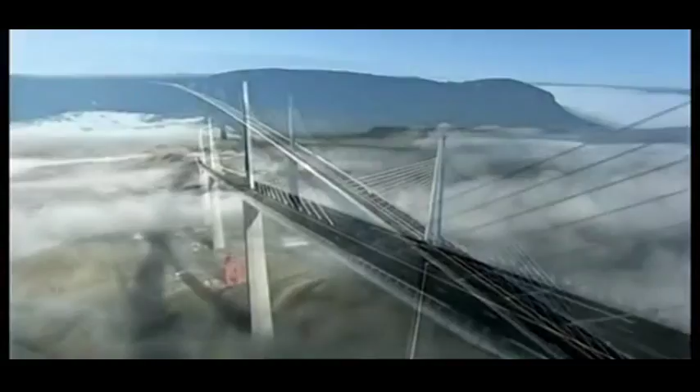This is the longest pure cable-stay bridge in the world, the tallest roadway in the world, and of course, at 343 meters, it is the tallest bridge ever constructed.